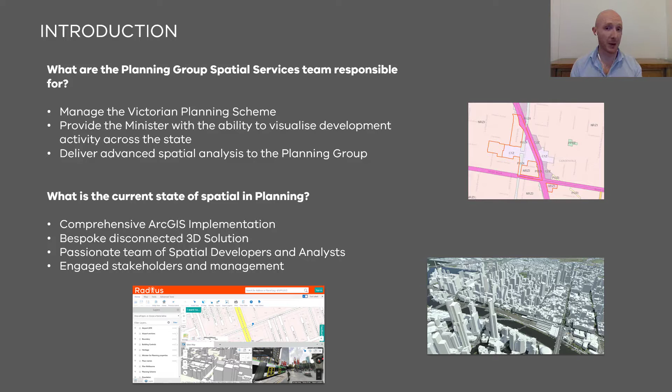We recognize there's a disconnect in how data is being used by governments, industry, and the community, often resulting in unintended disparate outcomes. The issues as we see it are, different parties are maintaining their own 3D based models in isolation. These groups are using conflicting tools to perform their spatial analysis, and many of the existing solutions are extremely complex to operate and limit the ability to collaborate and share data.

We identified a clear need for a consistent platform and statewide 3D model that allows all levels of government and the broader community to perform analysis and visualization on existing built form, proposed developments, and overshadowing impacts.

From there, we propose to build a scalable 3D platform to enable our stakeholders to collaborate, easily analyze, and visualize the future of Victoria. The solution was to start with a 3D web mapping platform and a detailed statewide dataset, along with a visualization capability.

The solution was required to provide a high level of accessibility. It needed to be both available on devices we use every day like our smartphones, but also intuitive to use for anyone, not requiring lengthy training. Tapping into the existing spatial expertise within the planning group, our objective was to provide an innovative and fit-for-purpose solution.

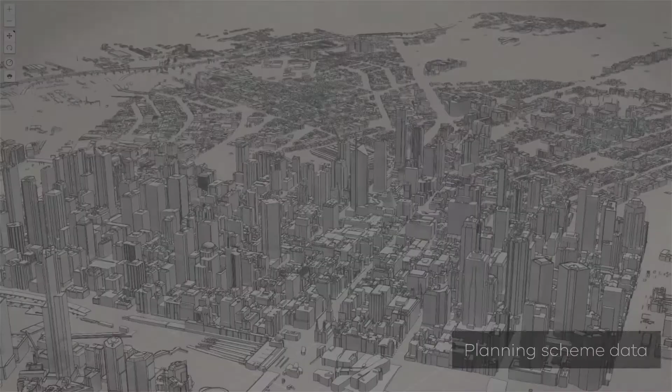Once we had a solid understanding of how the business operates and what their key requirements were, we performed an analysis and experimentation phase, developing the proof of concept you see on the screen right now.

We decided to put the ArcGIS JavaScript API and ArcGIS Enterprise through their paces when it came to 3D web mapping, to ensure it could deliver what our users were after.

Some of the initial components we focused on as part of the proof of concept included integration of 3D and 2D data, the development of tools to interact with the 3D base model, providing the ability to easily visualize highly detailed development models alongside the existing built form, and the ability to mock up or sketch new buildings from within the interface.

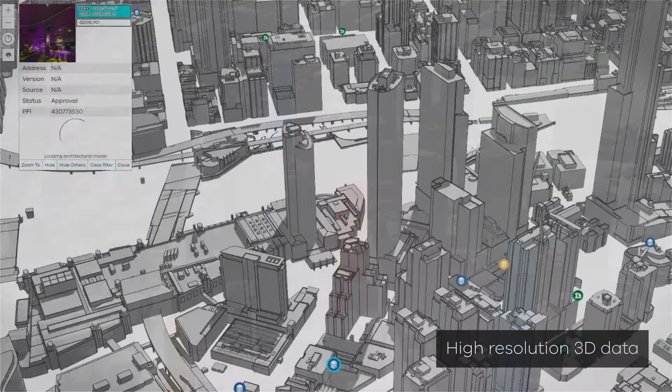Upon completion of our experimentation phase, we documented our findings and produced a design for the formal solution. We were satisfied that our selection of tools and technologies would be able to deliver the solution we were looking to implement. So what were the technical elements that we planned to use?

Well, first and foremost, the ArcGIS JavaScript API. As you'd all be well aware, the API provides a great deal of functionality out of the box, along with an exciting roadmap of features ahead. It would also allow us to easily integrate with our other spatial systems and services within the planning group.

Secondly, ArcGIS Pro. As you're all aware, ArcGIS Pro provides a great deal of data analysis and management capabilities, and it allowed us to easily publish and manage our 3D spatial data into the ArcGIS Enterprise environment.

The ArcGIS Solutions for state and local government. This is a real hidden gem from Esri, and it provides a great range of tools to support planning and development. The key areas that took our interest were firstly the 3D base maps component, which supported the authoring of high quality 3D base maps, and also the development impact analysis component, which was a collection of maps and apps used to assess the physical impact of each new development on the existing community.

Next up, CityEngine, ArcGIS Urban, and Unreal Engine. CityEngine has been used to some extent within the department, but we saw this project as a chance to take full advantage of the advanced 3D modeling capabilities it provides. Alongside this, we identified ArcGIS Urban as a powerful support to our urban planning projects that focus on the development of new precincts across the state.

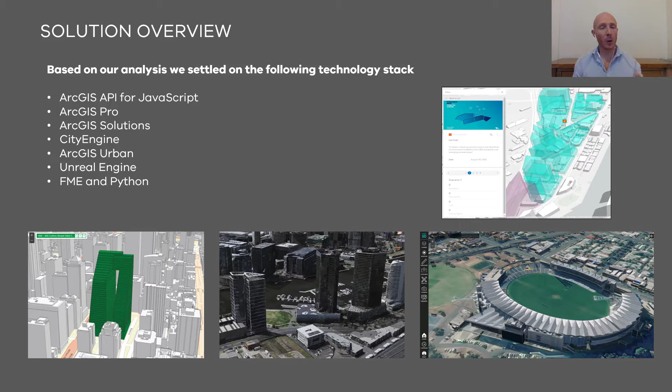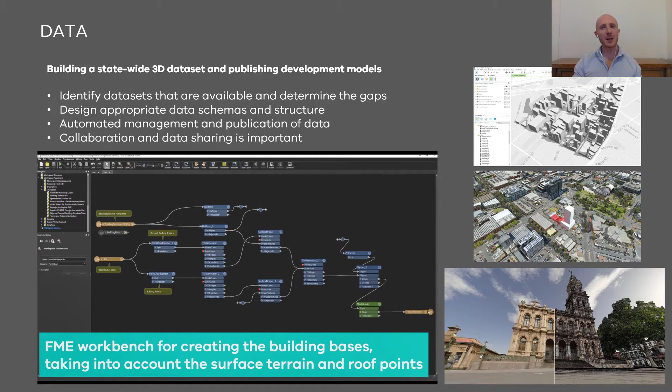I'm now going to spend some time with you walking through the solution areas in a little detail. And firstly, I'm going to talk about data. As I've stated previously, we realized early on that the success of the project hinged on a solid data schema and data management strategy. With our solution not being solely focused on metropolitan Melbourne, we knew we had a large task ahead of us to not only build out a full 3D base map for the state of Victoria, but also provide other data sets that would aid in the analysis that needs to be undertaken within the application.

The key steps that we followed throughout the phase of the project were firstly identifying what data sets we have available to us, what are the gaps that exist, and how do we plug those gaps? Secondly, we built out our 3D base map using ArcGIS Pro, the ArcGIS Solutions, Python, and FME.

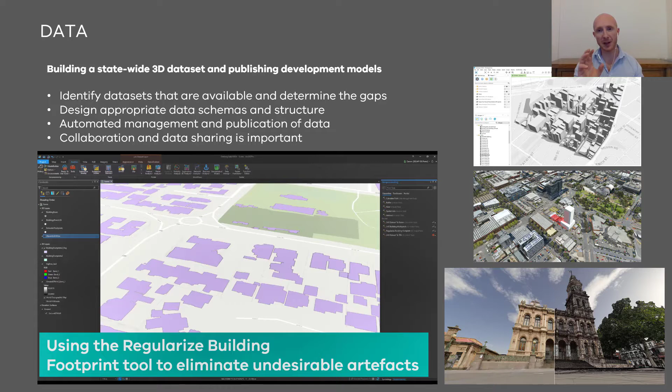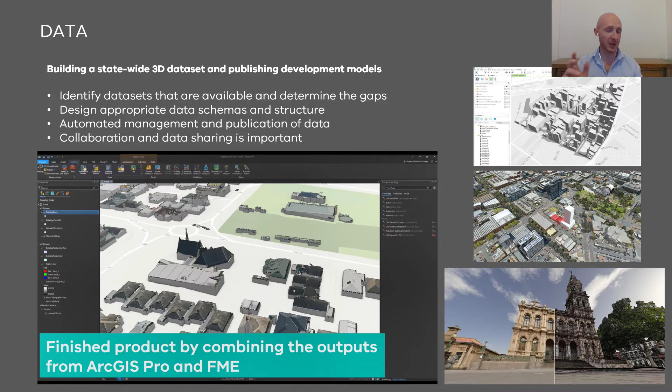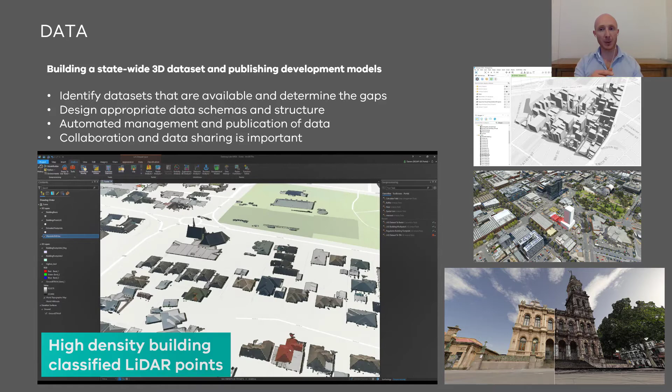Then we wanted to ensure our data management strategies were robust, automated, and streamlined. We wanted to ensure from the start that we had solid methods in place to manage the data and eliminate any manual processing and publishing of data. To achieve this, we utilized a combination of Python and FME to set up automated publishing routines, which would push the data to portal as soon as new as-built or development activity models were provided to us.

The ArcGIS solution for state and local government provided us with some fantastic tools out of the box within ArcGIS Pro. The team was able to leverage these powerful features to fast-track aspects of the project implementation. For those unaware, the ArcGIS solution for local government and state and local government includes a series of focus maps and applications designed to help us leverage our GIS information and the ArcGIS platform to improve government activities and enhance services delivered to the general public.

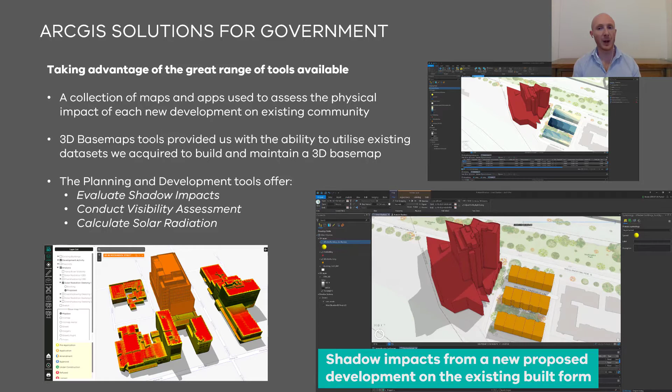As stated, we focused on the following modules: the 3D base maps and the development impact analysis module, which provided us with a set of capabilities that helped us create solar radiation maps, evaluate how proposed developments will cast shadows on existing buildings, and review the impacts of viewsheds.

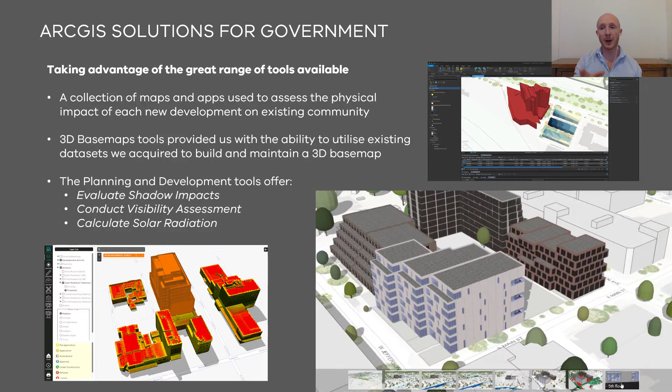By integrating these with other tools and processes, we were able to build out a full statewide 3D base map that's not only used in Vic3D, but also our other ArcGIS web-based mapping applications. Overall, the ArcGIS solution workflows were really powerful, really easy to use, and streamlined a lot of the analysis that would have typically taken far longer to deliver.

In regards to the web application Vic3D, the focus areas for version 1 included the ability to visualize existing built form and development activity data, the ability to undertake shadow analysis from within the interface, be able to calculate area and distance within the 3D scene, various viewshed tools, the ability to sketch up models when potential models aren't provided to us, and a camera tool capability to set up defined viewpoints and perform fly-throughs.

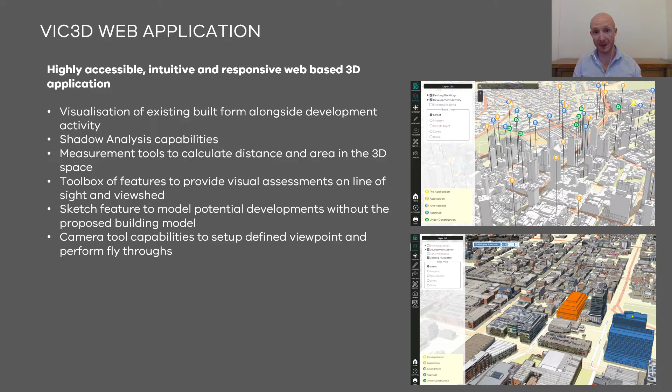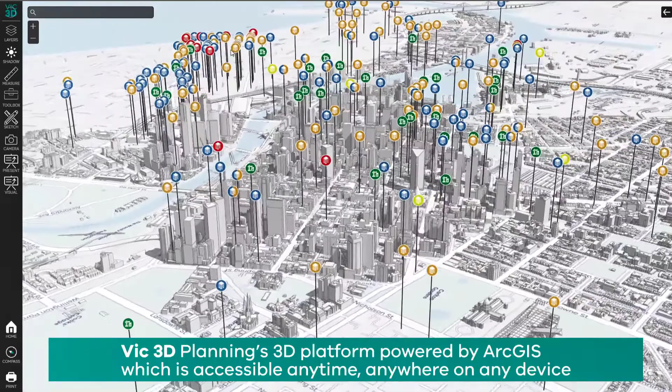I'd like to now showcase some of the features that have been delivered as part of version 1 of Vic3D. As stated, it's a statewide 3D viewer built using the ArcGIS stack of technologies developed to be easily accessible through a web browser. The application incorporates existing built form models, proposed building and BIM models, highly detailed mesh models alongside the Victorian Planning scheme and other key data sets.

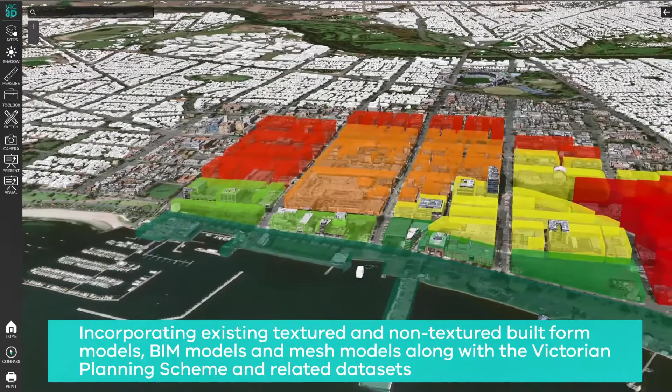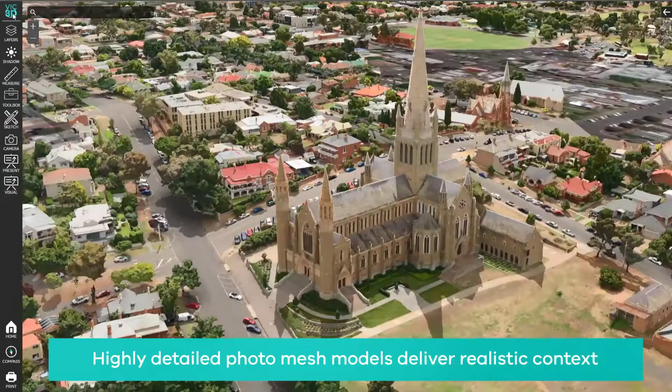We wanted to make it simple to visualize development activity and their status across the state, so we settled on markers which would bring in the building models when clicked upon. Highly detailed mesh models were incorporated to deliver realistic context for priority areas.

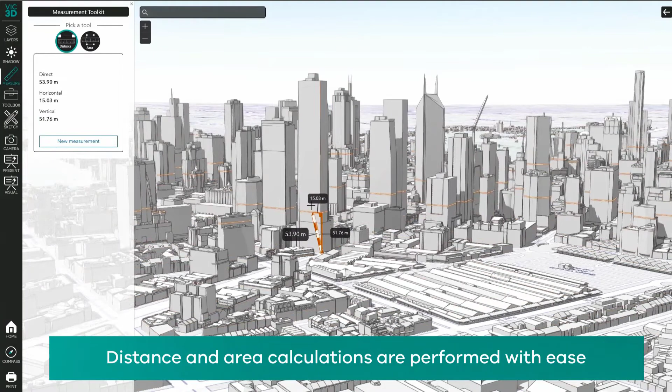We introduced the measurement tools available out of the box from the ArcGIS JavaScript API, and we also leveraged the dynamic symbolization capabilities available through the API to update how buildings look based on an attribute such as building height, along with filtering the dataset as required.

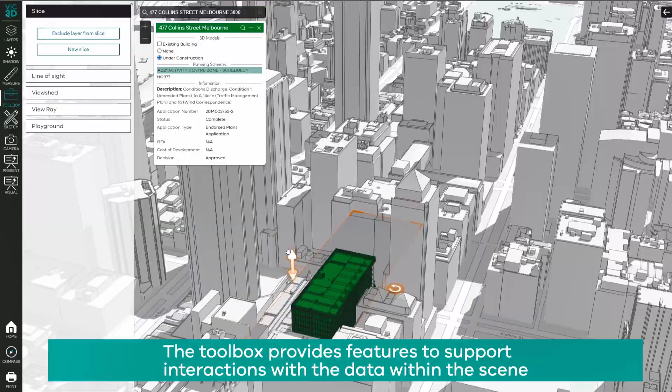Other functions we incorporated through the JavaScript API included the slice tool, which is useful for revealing occluded content within the scene view. We also incorporated visibility tools which support operations such as undertaking a line of sight analysis between 2 points, generating a viewshed analysis, or dynamically analyzing the view ray from a user-defined location.

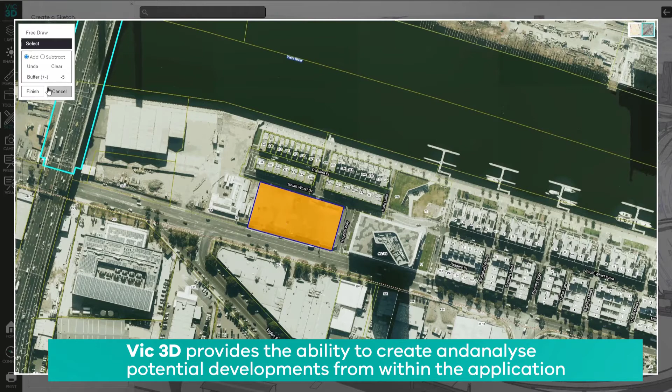One of our most exciting features is the sketch function, which allows the user to create and analyze proposed buildings within the viewer. The tool provides the ability to define a building footprint, how many floors and building segments would make up the object. All of these sketch buildings will then be available as part of any shadow analysis undertaken within the viewer.

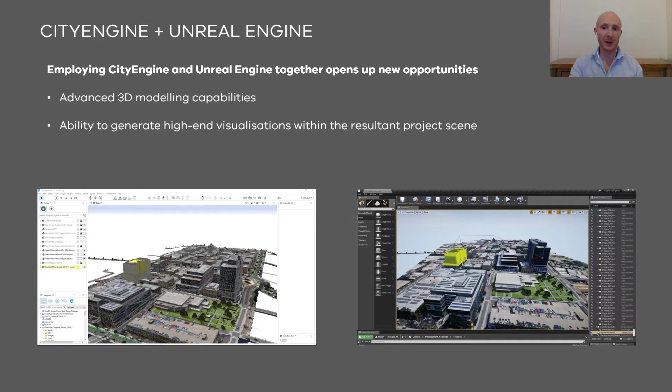Alongside the development of the JavaScript web application, we commenced investigating how we could potentially integrate and leverage our investment in CityEngine. This application has provided us with value when it comes to undertaking procedural modeling and scripting for planning urban environments. And we saw an opportunity to take this a step further by incorporating Unreal Engine into our solution for the creation of high-end visualizations.

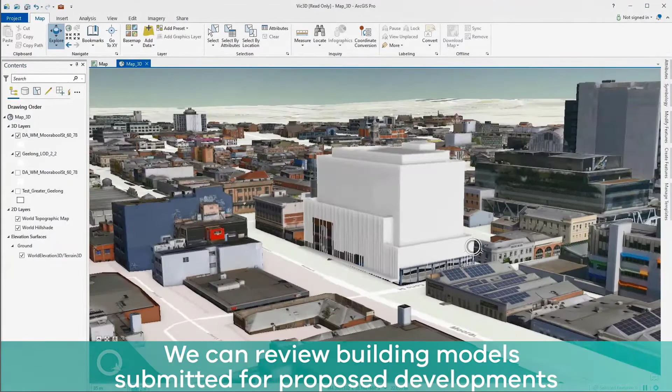This video provides a brief overview of the workflow that we have utilized to take our base 3D data, which is used within Vic3D, undertake enhancements and further modeling through CityEngine, and ultimately deliver high-end visualizations. We commence by reviewing the development activity model submitted to us within ArcGIS Pro. We can then load that data we are working with into CityEngine and undertake any updates as part of this project, which may include the creation of additional proposed developments or further refinements within the existing built form.

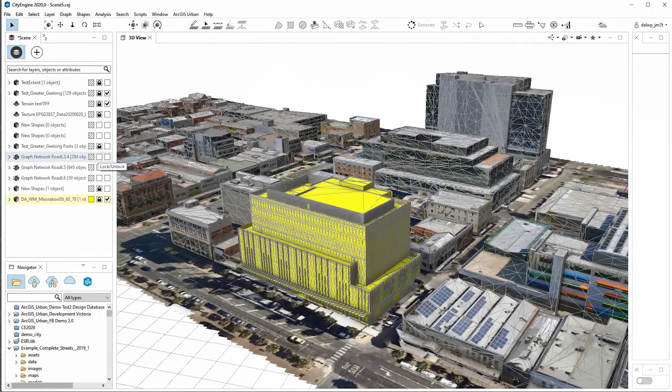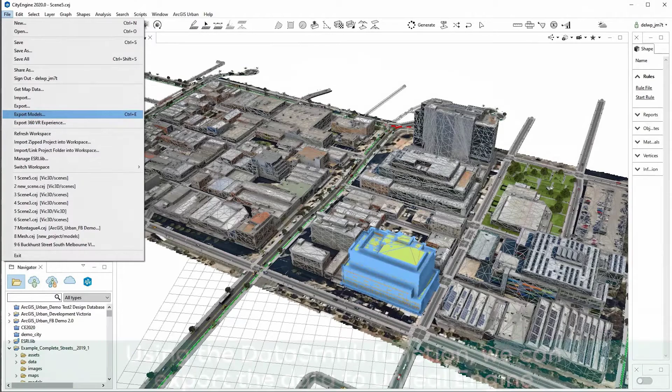Additionally, we can then go on and add street furniture, pedestrians, cars, using CGA rules to provide that extra level of realism. From there, we leveraged the Datasmith exporter to transfer the data efficiently from CityEngine and into Unreal Engine Editor. We now have the ability to leverage the powerful capabilities of Unreal Engine to produce beautiful and realistic fly-through visualizations.

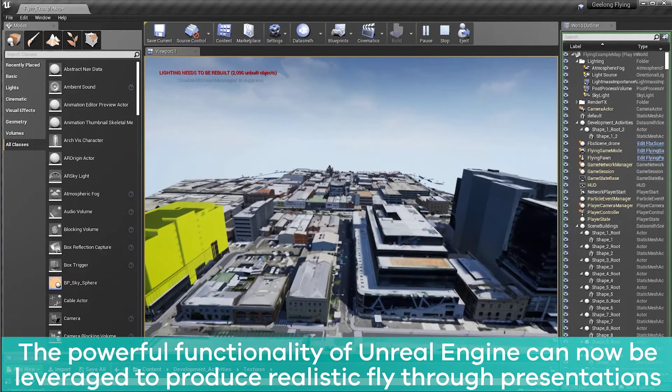Within Unreal Engine, we have the ability to apply high-quality renders and walk or fly through the project in real time. This also includes the ability to update lighting settings based on the needs of the project we are presenting. Ultimately, this workflow provides us with a great mechanism to produce high-end visualizations that can be used efficiently as part of community engagement and other forums of this type.

So far, the solution has been received really well from our stakeholders, but that could just be because it's 3D and everybody loves 3D. But I now wanted to run you through some of the immediate use cases that the platform is being used for.

One of the primary functions of our 3D platform is to provide a mechanism to easily visualize proposed developments across the city. When a building model is submitted to the department, it's automatically published to the platform, making it easy to analyze within the existing context. When multiple versions of a proposed development are submitted, planners can easily pivot between the two to review changes made.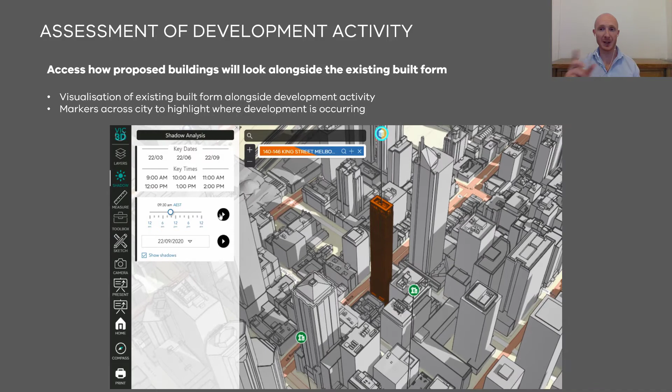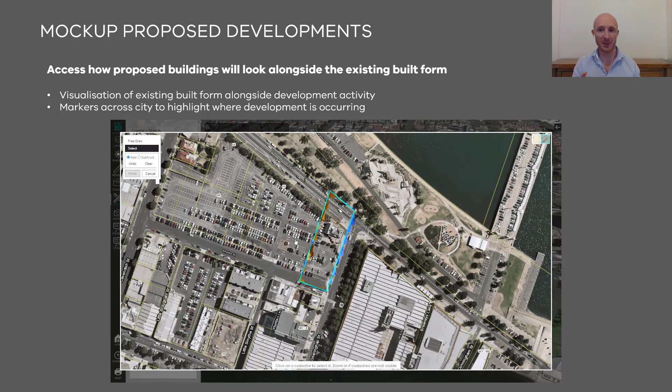But when building models aren't made available to us, planners need an efficient method to quickly mock up a proposed development from within the interface. This is supported through the sketch function, which allows users to easily create buildings, segments, and different setback configurations.

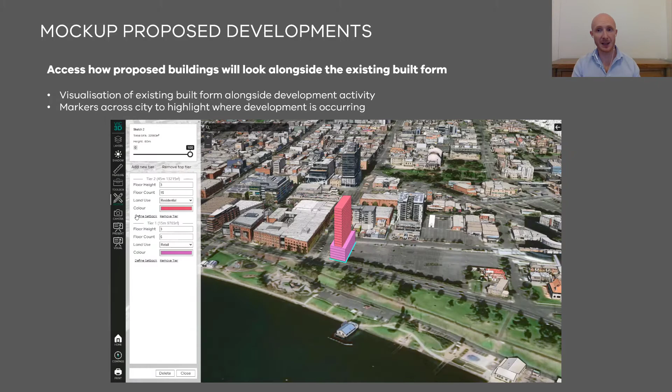Using a 2D web map integrated within the application, the user will define the building footprint and any initial setbacks. Then any number of building segments can be defined with number of floors and height, along with further setbacks. Once complete, these buildings form part of any analysis undertaken within the viewer, including the impacts of overshadowing.

In this scenario, though, we want to see if the proposed development will violate any restrictions, for instance, conflicting with building height controls in the city.

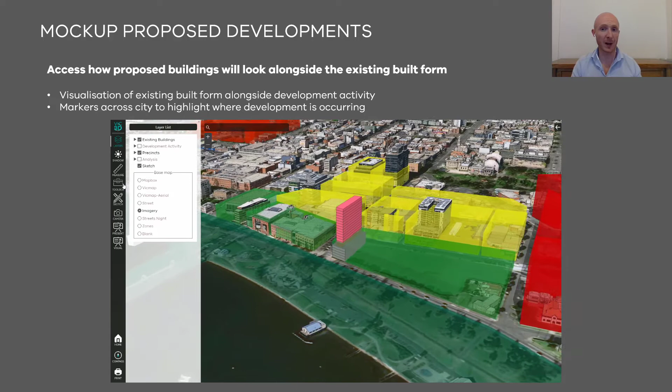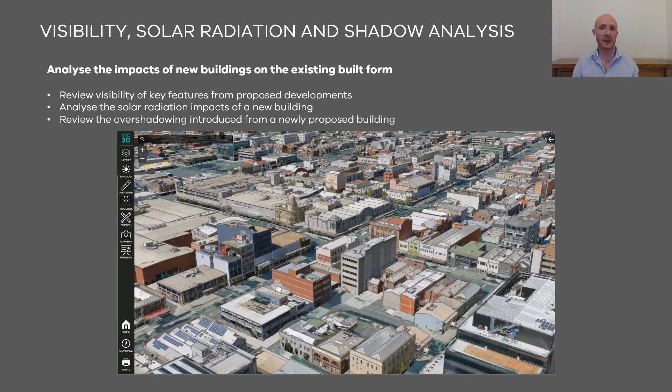There are also scenarios where we need to conduct visibility assessments for existing and proposed buildings. Planners can assess the visibility from or visibility of a proposed development within the existing built form. For starters, we can look at the level of visibility for the Yarra River from this proposed building. We can see the analysis shows that there's a higher level of visibility over the course of a single day for the higher levels, marked by that increased intensity of shading.

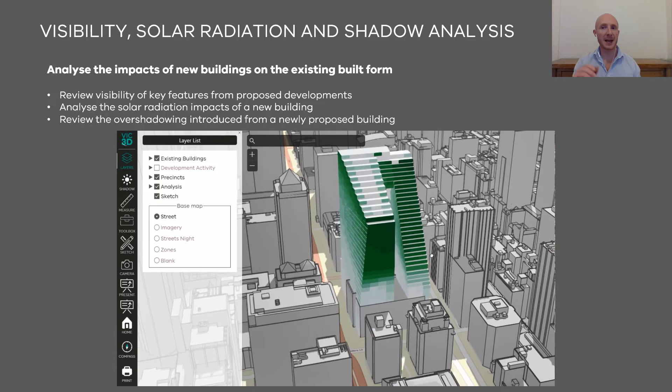Secondly, analysing solar radiation calculations can empower our planners to review building potential for solar panel installations. Vic3D provides the ability to review the solar radiation, both for the existing built form and how that changes with the introduction of a newly proposed building. This will help determine the ideal location for solar panels and the impact on existing solar infrastructure from new buildings.

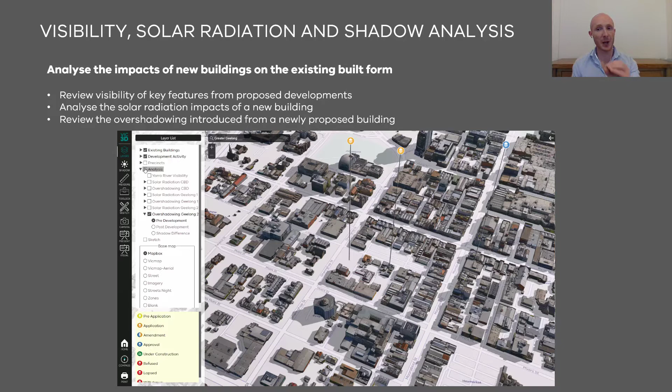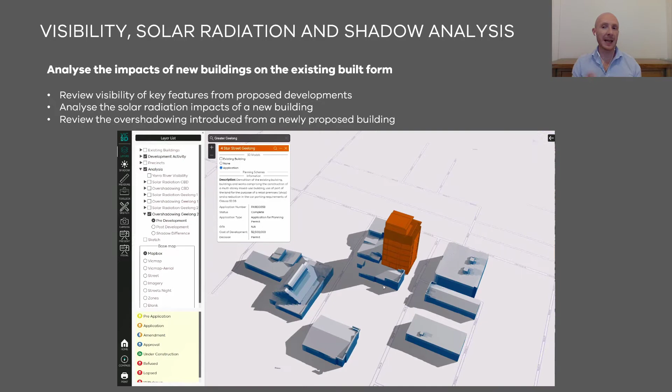And planners can also solely focus on the potential shadow impact of a proposed development on the surrounding buildings. In this scenario, we can assess the existing cumulative shadowing over the course of a single day, then compare that with the cumulative shadow after removing the existing building and introducing the new development.

Unfortunately, though, this doesn't highlight what has been introduced, but we can pivot to the shadow difference between the pre and post development. And this makes it simple to see which areas are affected by the newly introduced shadowing and the intensity of that over the course of a single day.

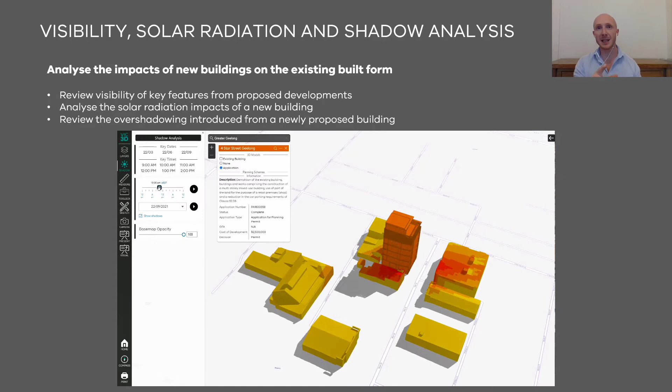Finally, the ability to generate realistic, high-end visualizations using a combination of existing built form and what's potentially possible has been a great option to have. As governments around the world have struggled to find ways to keep their economies going during the coronavirus pandemic, one initiative from the Victorian government is to encourage outdoor dining, increasing the allowable space for these kinds of arrangements.

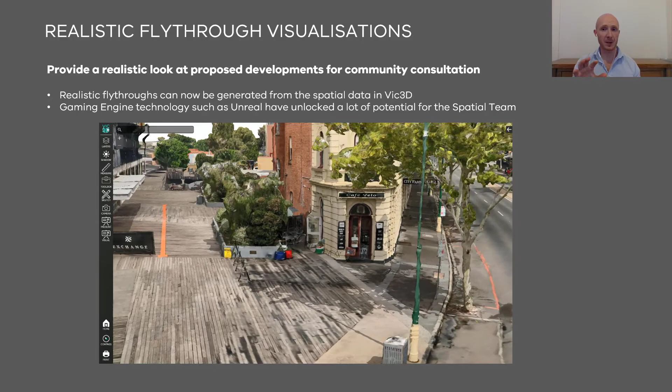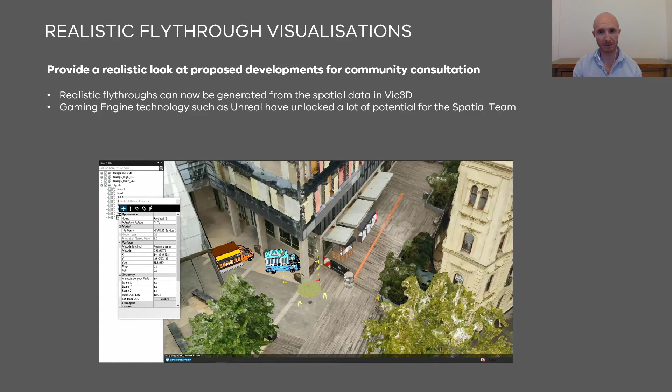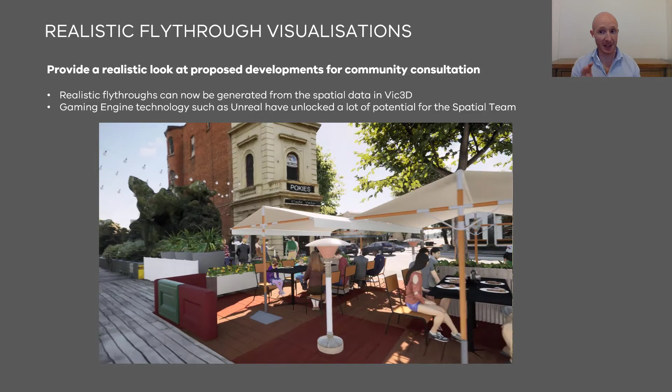Taking this area in Bendigo, which has a high potential for outdoor dining, and leveraging the great photo mesh data we have in the city, we could model up how this could look upon taking advantage of the new rules around outdoor dining. The end results, developed using Unreal Engine and the data from our Vic3D platform, provide a great way to consult with the businesses in the area to show what's potentially possible.

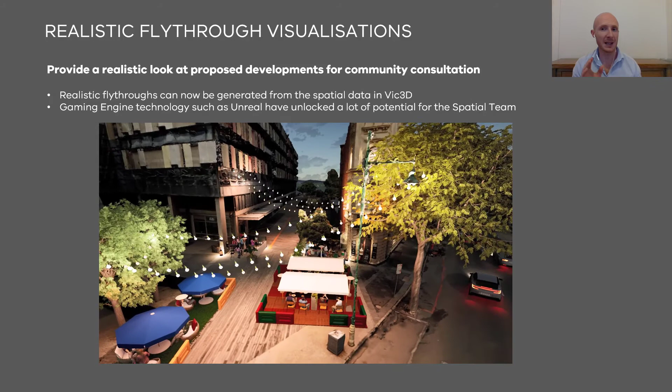From our perspective, the most exciting part through all of this is the fact that we in the planning spatial team can now generate these visualizations from start to end. The tools are all available to us through the ArcGIS platform and the associated products, which all integrate really well together.

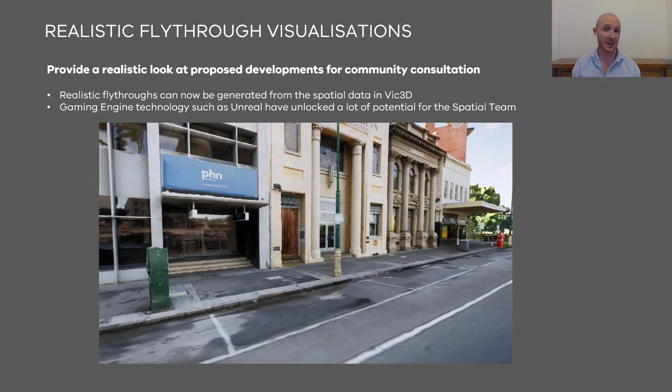With the successful deployment of version 1 of Vic3D, we took a step back and reflected on how far we'd come and what were the benefits delivered to the department. Firstly, we've delivered a solution to our stakeholders which will not only support their current needs, but it's also opened up a great deal of potential to do more analysis and ultimately have more data at their fingertips.

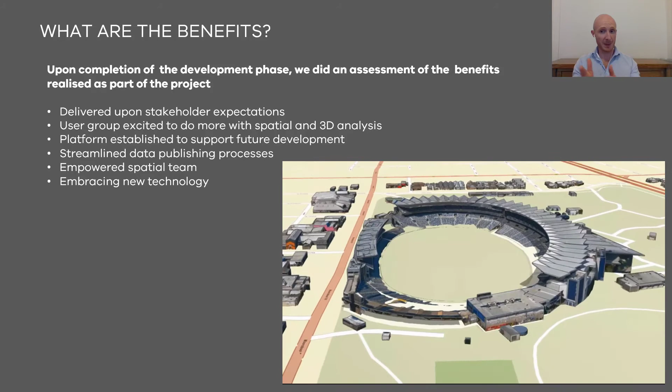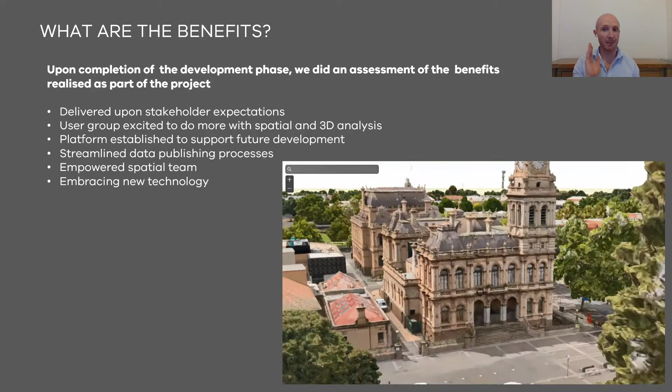As soon as a building model has been submitted to the department, FME detects the new model, interrogates the spatial database for related attributes, and publishes the model to Portal, making it immediately visible through Vic3D. Planners no longer need highly skilled technical people to help them review development activity. They can easily do it themselves whenever and wherever they need. We now have an empowered spatial team within planning.

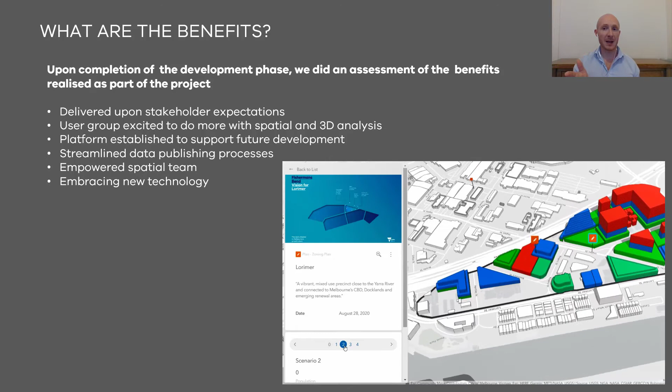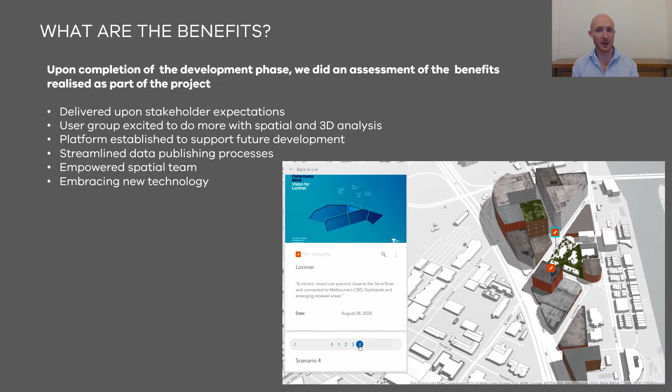The team has had the opportunity to not only learn new technologies and skills, but they've also been empowered to use those skills and benefit the planning group. The extended use of the ArcGIS JavaScript API has also opened up a range of opportunities to develop other more targeted web applications to support the planning department.

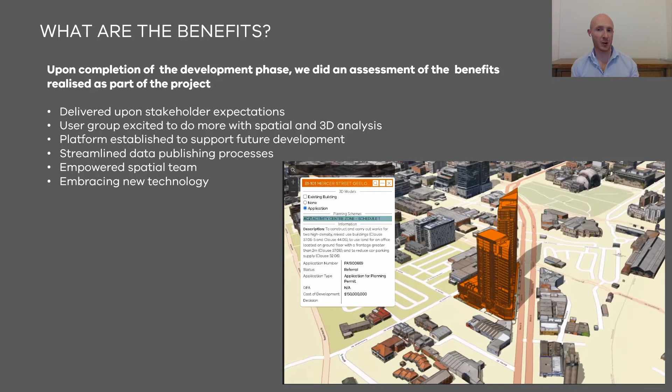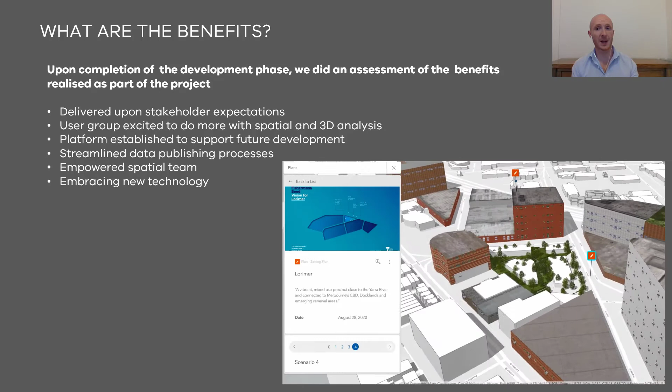And we've also developed some really strong relationships with key parties, not only within Australia, but around the world. Esri has been critical to guiding us through some of the more complicated aspects of the project, and companies like Aerometrics in Australia have delivered fantastic data sets and expert assistance along the way. And of course, the project has allowed us to play with some pretty cool technologies and toys.

But it doesn't end here. There are still a lot more exciting functions and tools to explore and introduce into our 3D solution. Some of those include in our road ahead, enhanced shadow analysis. There's a lot of potential to further enhance what's possible through the analysis of overshadowing, including isolating shadows for a single building and on-the-fly accumulative shadow determination.

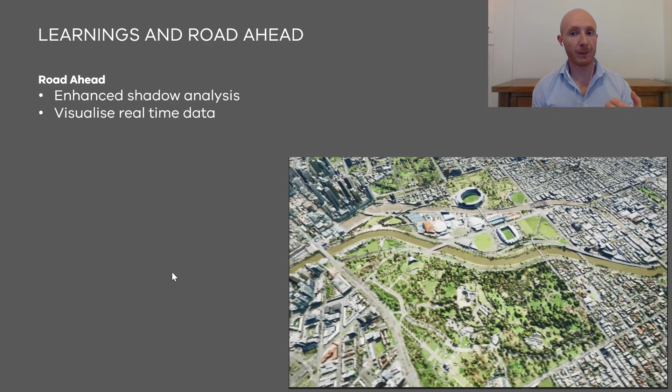We're really excited to see what Esri has in store for both the ArcGIS JavaScript API and ArcGIS Urban when it comes to that type of advanced shadow analysis in upcoming releases. Also, the introduction of visualizing real-time data within the viewer. We believe this will really support planners in making the most informed decisions at all times.

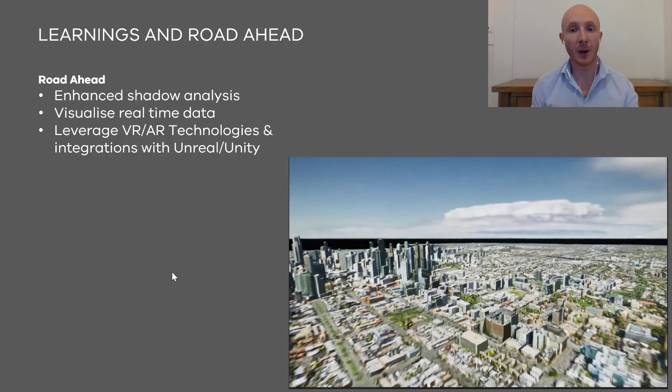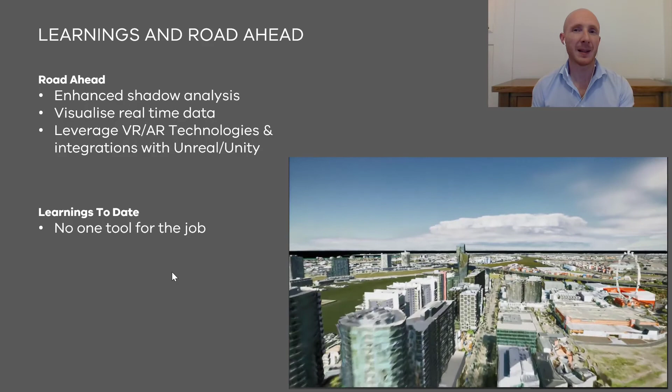And finally, a focus on leveraging and exploring what's possible through VR and AR within our application to further expand on our visualization capabilities. So after all that, what have we learned along the way? Well, firstly, there's no one tool for the job. There are so many great components across the ArcGIS suite, and while it can be daunting to keep across them, it's really worthwhile investing time in researching what's available along with talking to people experienced in this space.

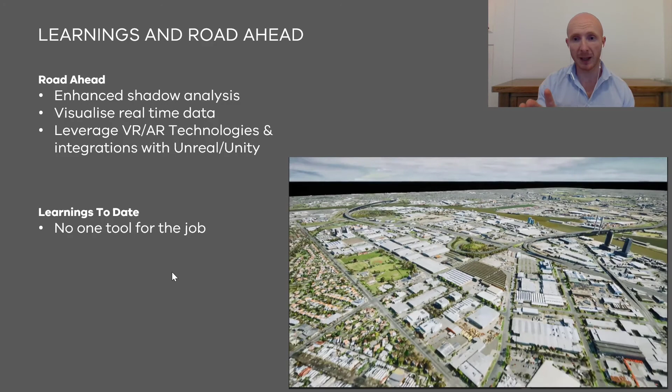Our research ultimately showed us that by combining various aspects of the ArcGIS stack along with other spatial tools such as FME, we're able to build a really exciting and powerful 3D solution. Business case and management buy-in. Without a solid business case and without management buy-in, we wouldn't have been given the latitude required to develop such an innovative solution.

Availability and accuracy of data. As much as we would love to have the highest detailed data across the city, you only really need data as detailed as your business case demands. Going beyond that only puts unnecessary strain on your system and of course on your budget.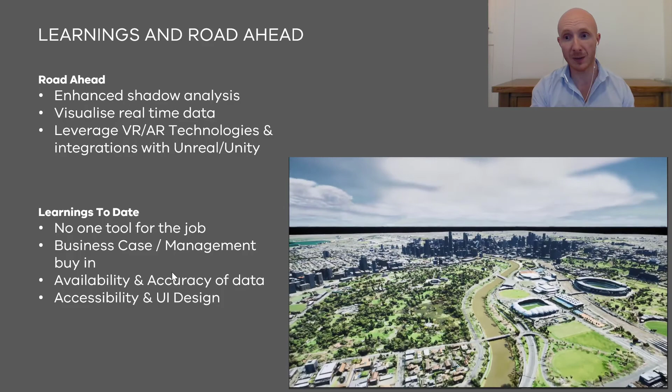Accessibility and user interface design. This is fundamental to the success of a project like ours. What you or I think is user-friendly isn't always going to be user-friendly to the planners and the associated users. So ensuring the application is accessible on a range of devices was a really big contributor to getting our end users on board.

Invest in your people or your team. Projects of this nature are a fantastic opportunity to fast track the development of your team. I've been so proud of the way that my team's worked over the last 18 months to upskill and ultimately apply these new technologies and understandings to develop such an amazing system.

And finally, collaboration. This project has demonstrated the value of a great collaborative working relationship, not only within the spatial team in planning, but with entities such as Esri, Esri Australia, and the likes. The success of projects like this are heavily dependent on us working together, learning from one another, and ultimately driving each other to bigger and better things.

So in closing, I'd like to thank you for your attention. I hope that you've really enjoyed coming along with us on the exciting journey of empowering planning to be done more efficiently in 3D using the ArcGIS platform.